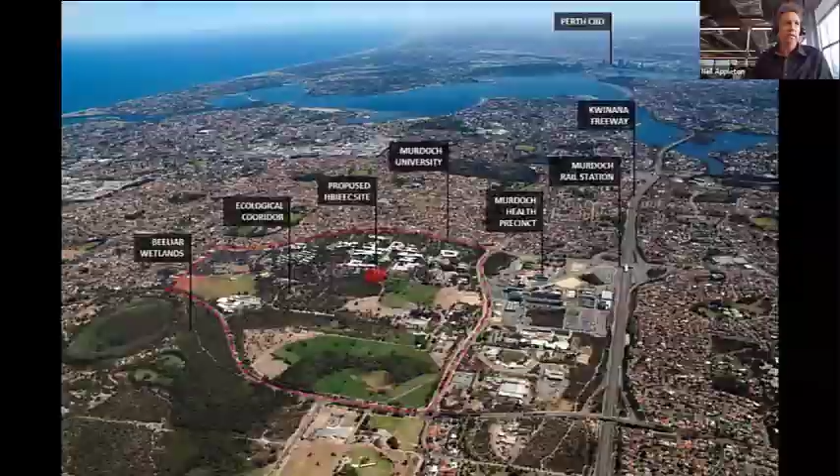It locates the building very much on Whadjuk Noongar country, but also on a semi-rural campus on the edge of Perth to the south, in what was a very heavy 1970s style campus, designed primarily and master planned by Gus Ferguson.

We were taken by how beautiful the campus was in many ways, around its structure and the bush nature of the campus, but also by how, in some ways, it was very resistant to contemporary modes of learning, which I'll talk to a little further on in the presentation.

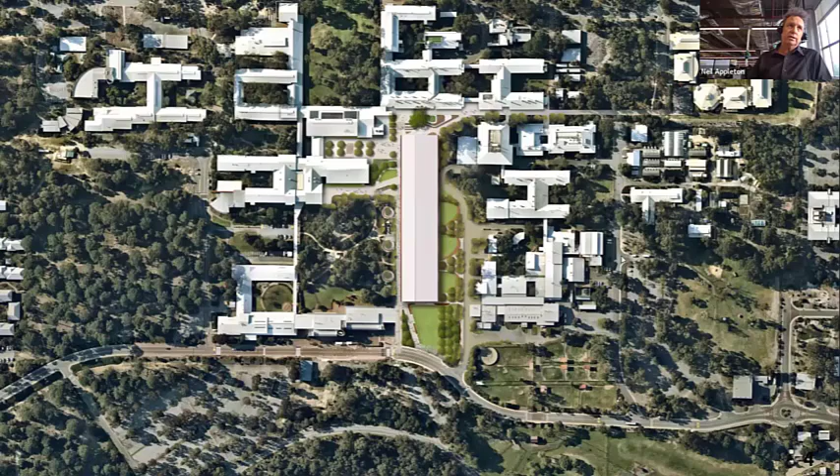Boola Katitjin was a major insertion into the campus. It had to accommodate a significant amount of teaching and learning space and become a nexus for all the students on the campus, but at the same time it had to connect from the major entry to the south on Discovery Way up to Bush Court.

Bush Court is effectively the heart of the campus, past Banksia Court. So not only did the building have to provide lots of space for students and academics, it also had to perform a very strong urban design piece on the campus as a connector, both to the environment and to the adjacent buildings.

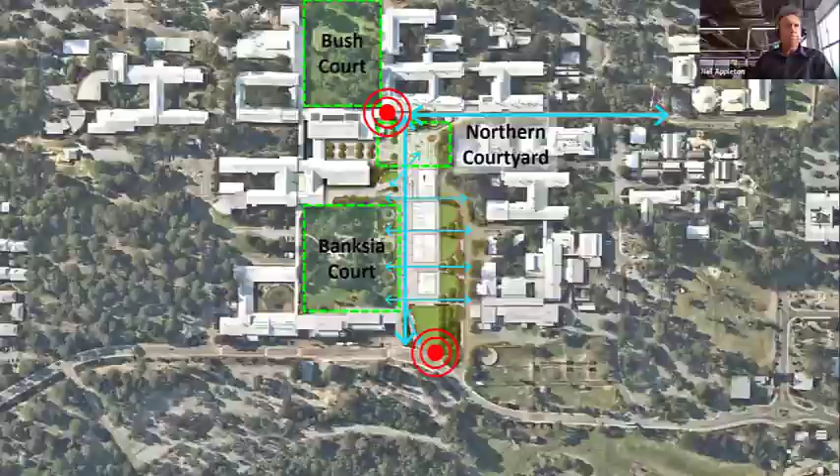It's obviously a very large insertion relative to the other buildings, but it's also in some ways acknowledging those buildings. From the very inception, the university was keen on demonstrating a commitment to the environment.

Not only in the sense that the building is highly connected visually to the environment, a lot of the educational spaces and peer learning spaces are outdoors in this building, with obviously large areas of shaded glass.

But they also wanted to innovate in timber construction, and the design team was very happy to come on that journey with them and drive a great outcome for the university.

Very large span teaching spaces, in that sense that we wanted to have timber both indoors and outdoors.

There's a substructural concrete base coming out of the ground, but then timber from the very lowest part on the south all the way up to the outdoors had a mixture of both internal timber elements, which were spruce sourced from Italy.

Dolomites, Hess, and then external timber that was either protected or exposed, which we had to then treat, and that's Australian timber, hardwoods sourced from Victoria sustainably through stewardship programs.

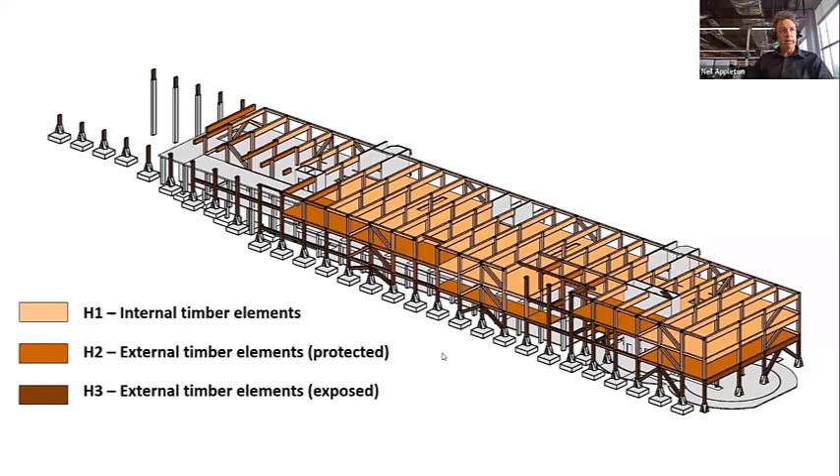As you can see, the building, as it came up, variously had a combination of these different products, depending on whether it was indoors or outdoors, until we arrive at a very large superstructural roof element, in keeping in some ways with the campus, but very much skewed and asymmetrically deployed to provide greater shade to the open areas to the west.

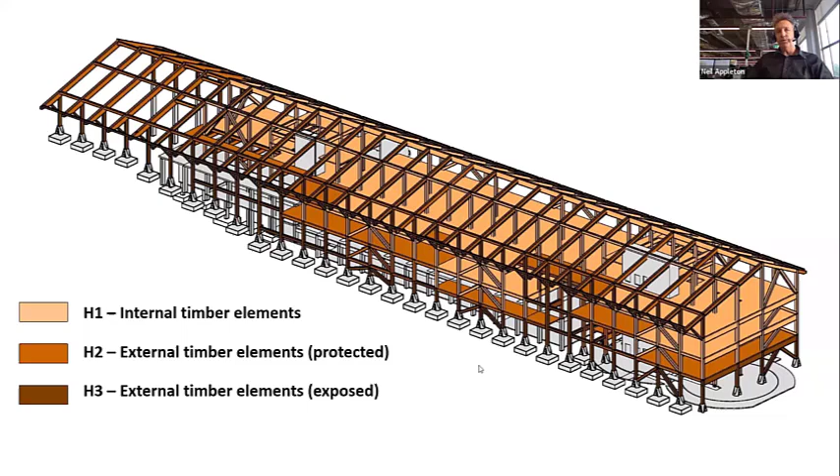And shedding rain, solar panel farms on the roof, etc.

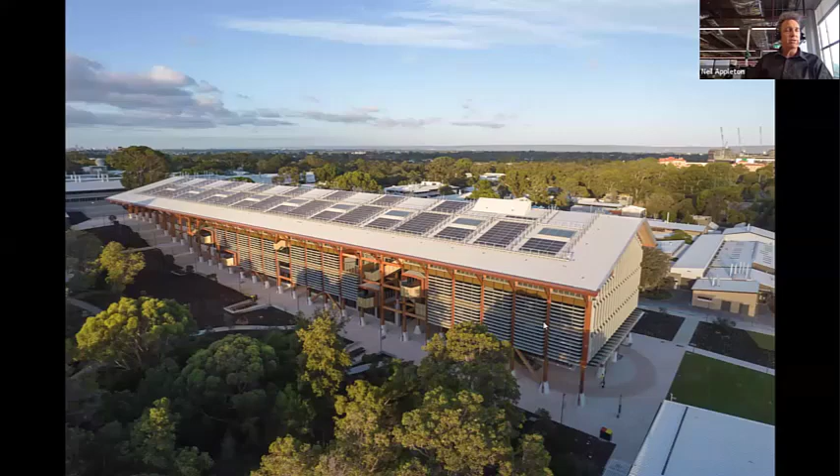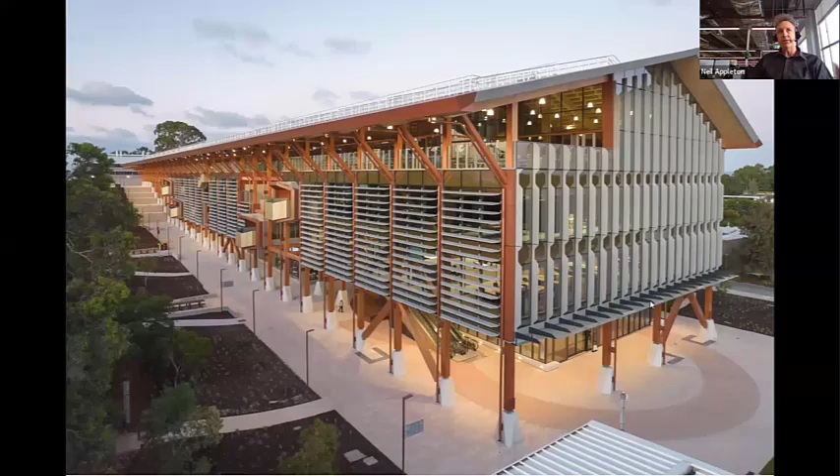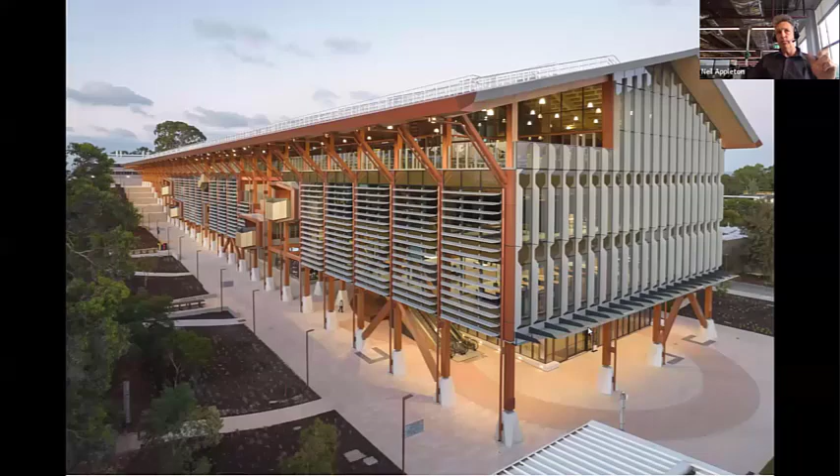Lots of sun shading, but wherever we found possible, we tried to bring the timber out to make it visible clearly inside, but out externally treated to obviously withstand the weather. Getting that balance between what was cladded and what was open was really important in terms of making sure that the building will last for a long time.

You can see in this view the roof is also constructed from CLT, which spans between the main roof beams, and to the west that large urban colonnade that runs in from the bus stops and the drop off on Discovery Way all the way up through the campus, where you can either choose to remain under the eaves but outside of the line of the building, or come into the building and traverse the length of it without going inside, but well undercover through the informal learning spaces, which you'll see as we go further.

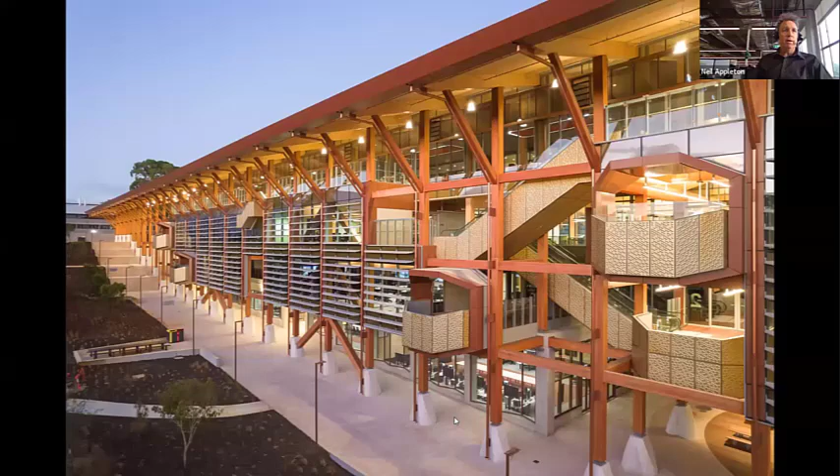Concrete kept at very much the ground level, raw on show, but as we progress up through the building, the timber then stacks in a modular, systemic way wherever possible. But of course, we also look to break the system where we think it's important to bring outdoor learning spaces to over the top of the large urban colonnade. And lifts as we go up.

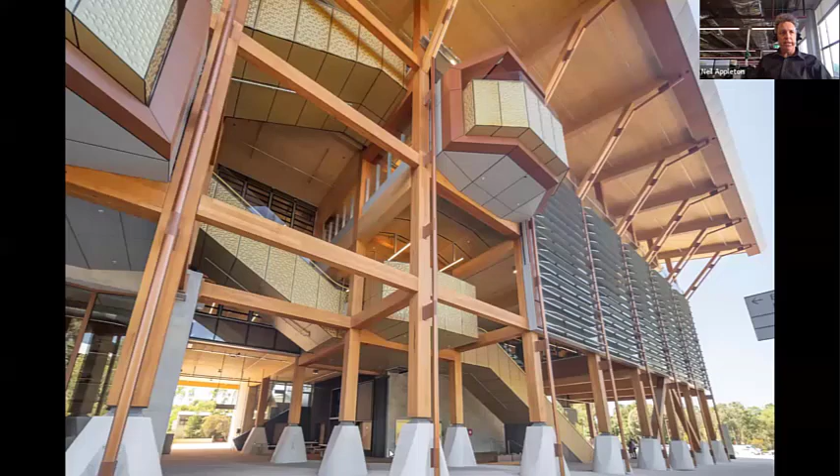Importantly, also, you can see that we've made connections laterally through the building on every level, which I'll talk to in a minute. But at ground level, we are making the building, given its length, a very porous building from Banksia Court across to the veterinarian buildings on the far side.

As I mentioned, a lot of the outdoor learning spaces connected to indoor learning look back towards Banksia Court, giving a sense of deep connection, but also a sense of how it knits into the campus, creating a clear sense of student promenade through from Discovery Way to the upper level of the campus.

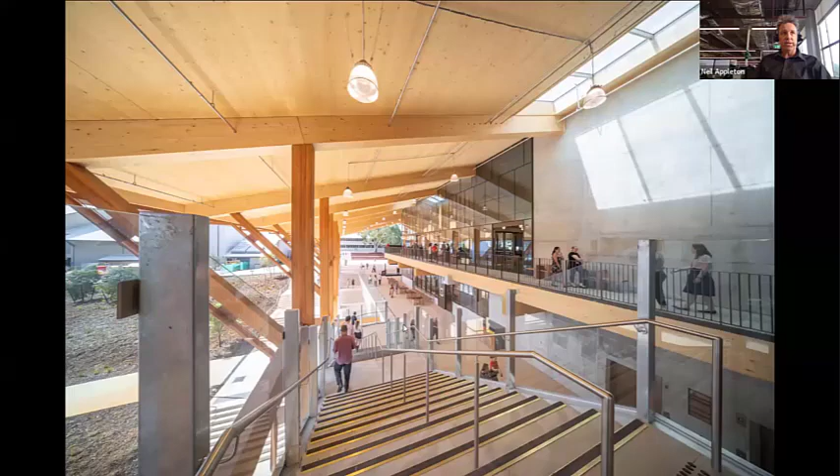And you can see this image. There is a destination space, which we in the video talk to a large meeting and gathering space adjacent to a large remnant gum tree that was retained through the project.

I mentioned Gus Ferguson's work. We find it very strong architectural work, which we enjoyed, and we felt that it was important that in some ways we riffed on the sense of the campus, not to throw it out, but to take some of the systemic language of Gus's, but to reinterpret it very much in a new, lighter timber form.

And as you can see, as you come out of the large bush court, Boola Katitjin is a very large and welcome opening to the north around that gum tree. So a very large space.

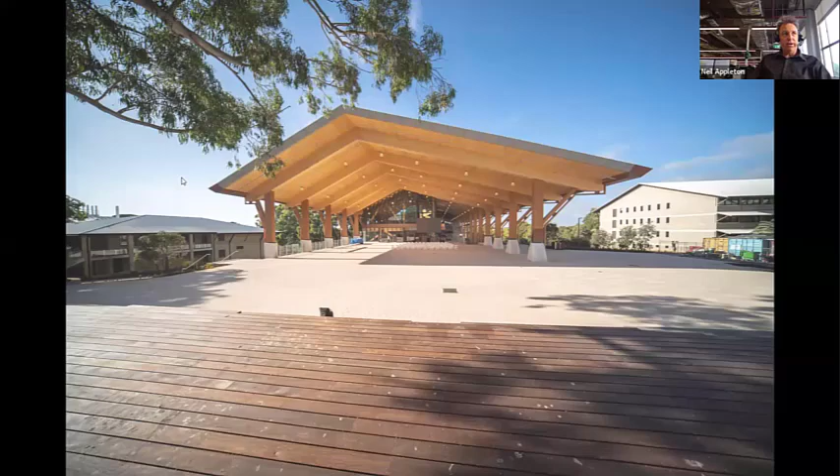I'll leave Aurecon, Ralph, to talk to the complexities of the structure in this area, but it's a really important gathering space. Again, as you can see here, Aurecon very committed to testing this structure within an inch of its life to make sure that it could withstand the rigors of lateral loading, given the shape of the structure as a portal frame. But it also importantly serves as a large cultural gathering space.

So as you can see, the linear orthogonal nature of the Gus Ferguson master plan, very long, thin buildings with double-loaded corridors, and the dark green effectively showing the flat floor teaching space, which are smaller format, let's call them tutorial rooms, and larger lecture theatres.

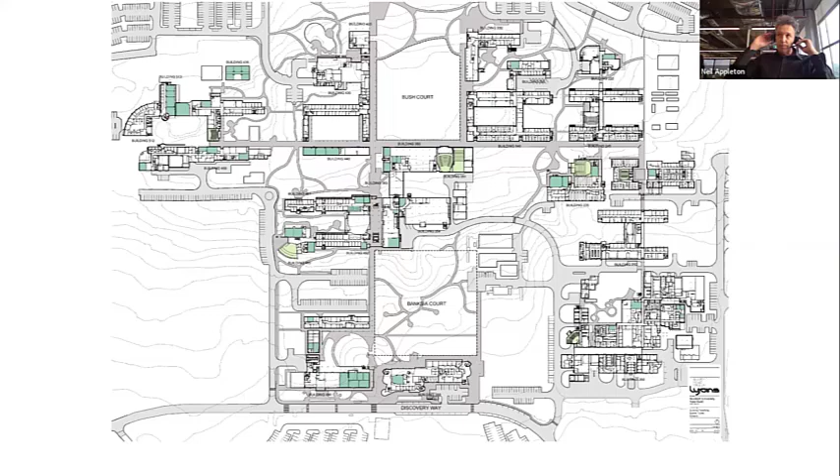And clearly, as you can see, that's a sort of, in some ways, there's an element missing under contemporary scale teaching, which is the ability for large groups of students to break into smaller groups and collaborate.

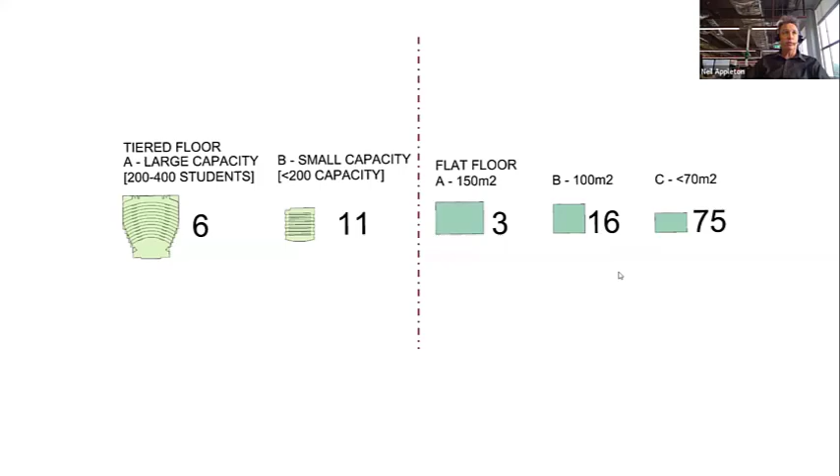That's the whole of the teaching cohort range within the campus. Before we started the project, our aim was to try to open up that middle ground where we had large format tiered and flat floor space that allows students to have didactic delivery, and then to move to informal learning in groups.

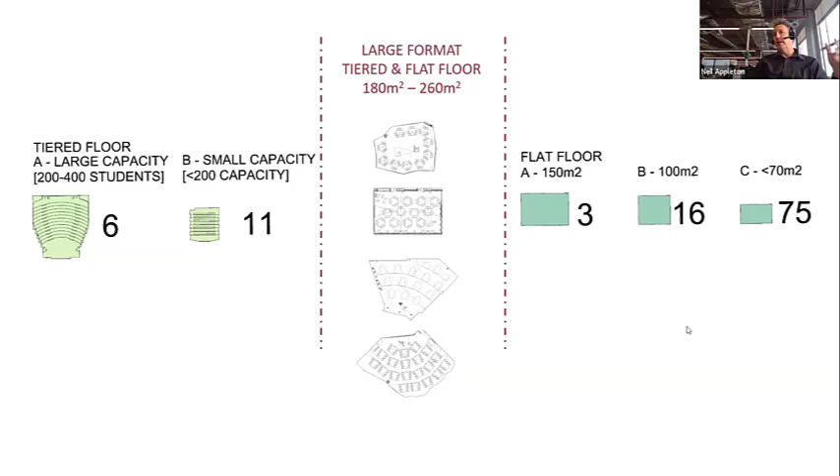The corollary of that is they then have large areas of indoor and outdoor breakout space to connect into. So that basically significantly increased the teaching space for the university. And whilst it still requires tutorial space and other learning closer in the academies, here we have a large general purpose teaching destination area on the campus. They range from 60 strong to 120 strong, with 90 being in the middle, and a whole range of different

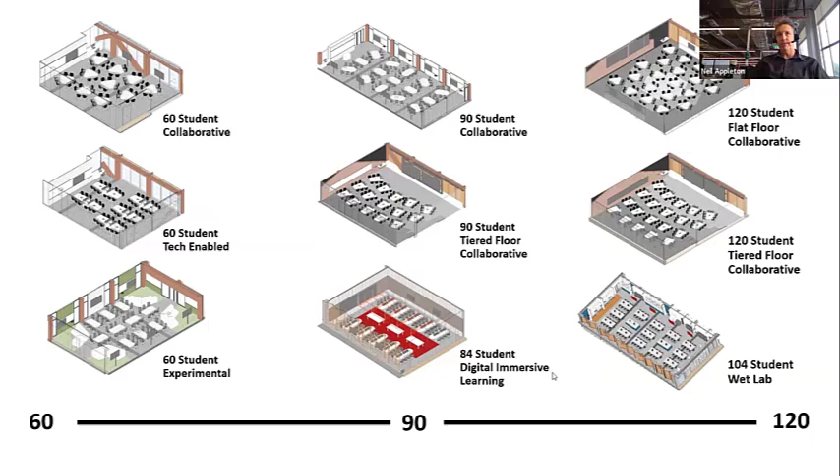Contemporary educational styles that are structured within that timber, large span timber portal frame post and beam structure.

In plan, imagine this is the upper level where the meeting space of Boola Katitjin on the north is. You can see that large corridor that runs through and arrives at a large informal learning hall in the middle of the building, which then has double loaded corridors. In some ways, it's a very large scale version of Gus Ferguson's plan, but we've stretched the corridors much wider to create a large informal learning environment in the middle, and then scaled up all of the teaching space on either side.

And at the very south end of the building, we also have a destination space for staff. Again, no designated faculties. This is actually a space for all staff to go and work in when they're engaged in teaching activities or afterwards.

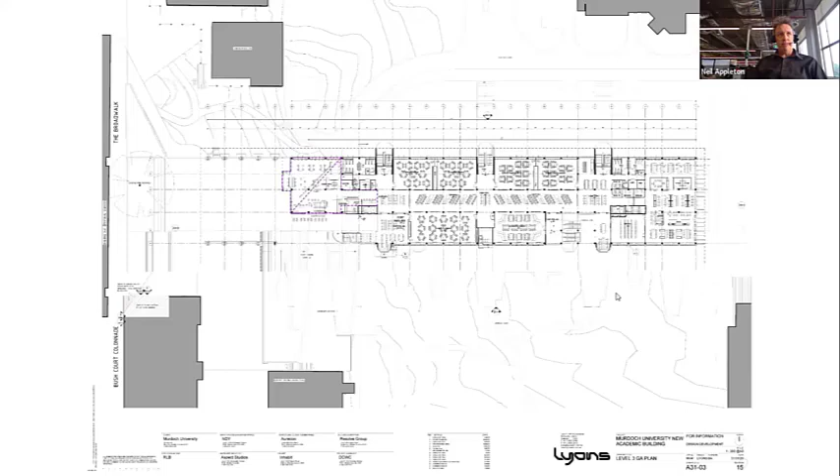The large spans are 11 metres for the timber, 8 metres through the middle, and 6 metres in the other direction. Very systemic and modular. But that still provides very large, 170 to 180 square metre spaces for collaborative learning, technology enabled learning (TEL), and experimental learning throughout the building.

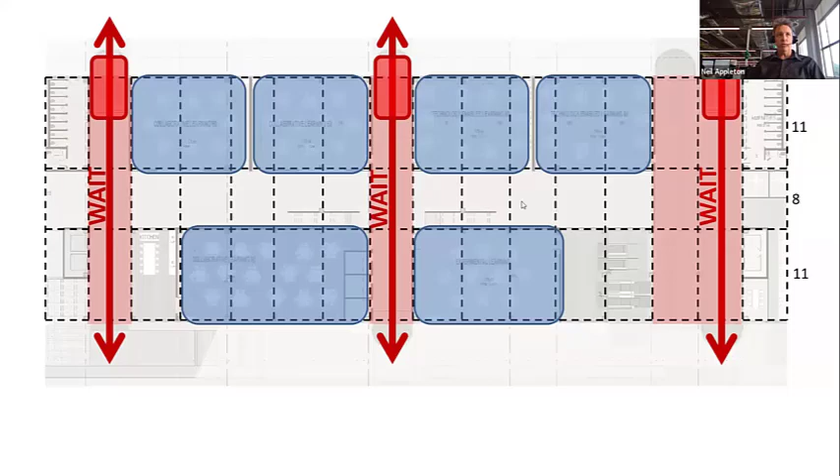Importantly, cutting through the grain of the building, we have large open breezeways that connect to the outside, with circulation nodes out to the east, views to the west, giving opportunity to wait and pause as you walk along the length of the informal learning through the student halls and then into the classrooms.

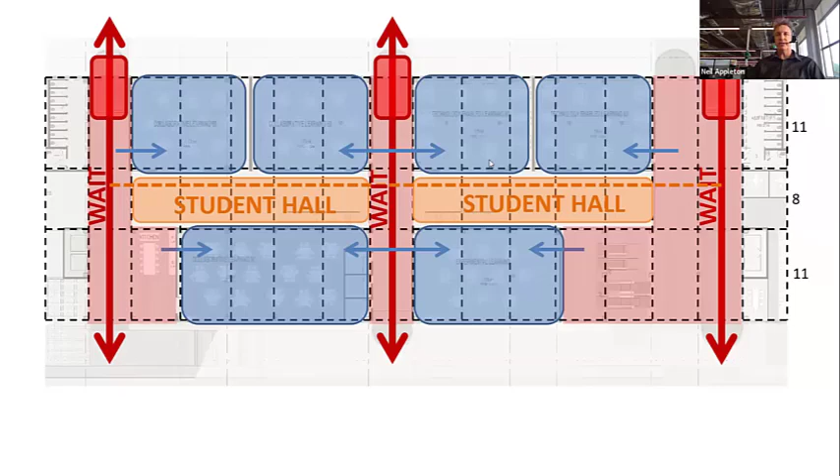Quite differently, rather than having entrance into the classroom spaces from the student hall, we inverted it and brought them off of those throughways, as a way of making the student hall not feel like it's continually space that has students moving through it, coming in and out of class and waiting to go into class. So the waiting space is flipped to the lateral spaces.

A key part of the design activity, which we worked very closely with Aurecon all the way through, was to think how we could deliver the engineering services through the building. We've got a UFAD system, underfloor distribution of air, and also bringing some of the other cabling through the floor. The benefit of UFAD, or low velocity air conditioning, is that it delivers the air at a slightly warmer temperature than needed, blowing it back down to the students and teachers at the lower level, which is important given the high floor to floors we have in this building to take advantage of the benefits of the timber.

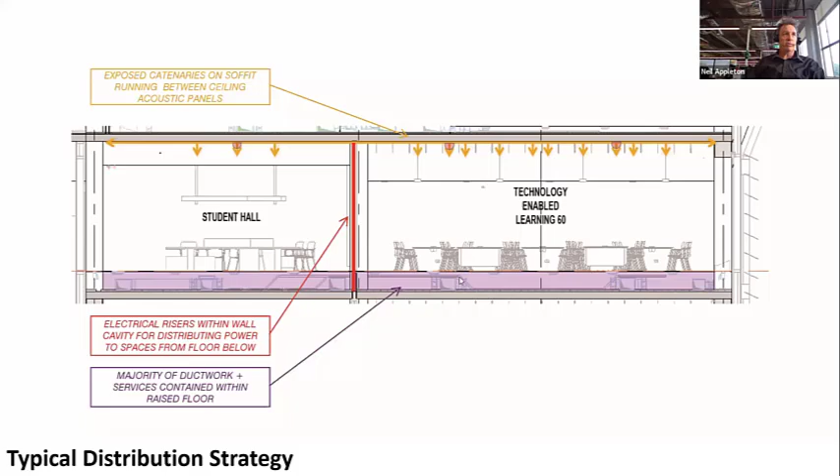And then, of course, we have very well designed systems. We put a lot of effort into designing the catenary systems on the soffit, along with acoustic paneling, with electrical risers running up through the walls from the cavities.

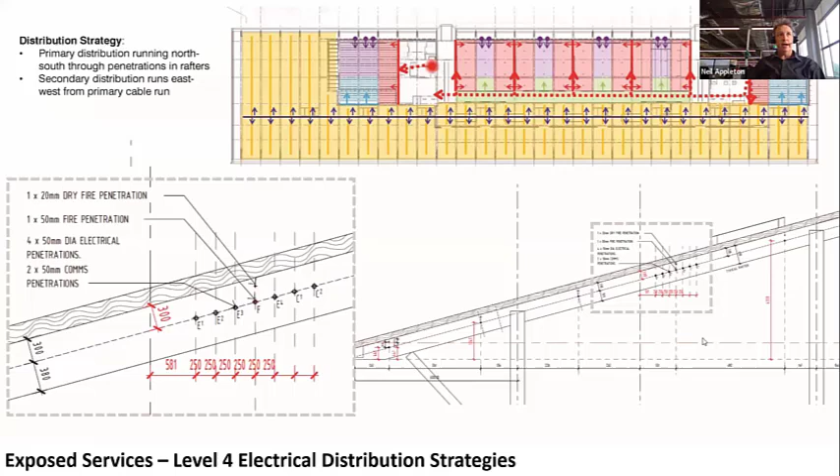Much of this was done through a very detailed shop drawing process. You can see here all of the services, significant fire, dry fire penetration, electrical pens and comms had to be all pre-designed through the timber, so that when it all came on site, it was all prefabricated, which sped up the construction process significantly, made it much simpler, and gives a very neat effect. That was a really important part of the design, to get all of that done through the design phase and not leave it up to site.

It's worth pausing to mention Multiplex, who are an incredibly key component to this project. They did a lot of work and research to make sure this building came together well. Whilst we all would talk about the biophilic benefits of working in a lovely building that's got structure on show, the smell's different, even Multiplex said that constructing this, once we got past the concrete trades, was an absolute joy because the site was much cleaner, and things came together much more quickly.

And I guess if you think about the labour force, 400, 500 people that work on these buildings for 2 years, the fact that they're enjoying their labour more, their construction, I think is important as much as it is for the legacy of the students and teachers in the future, enjoying the benefits of the timber structure throughout.

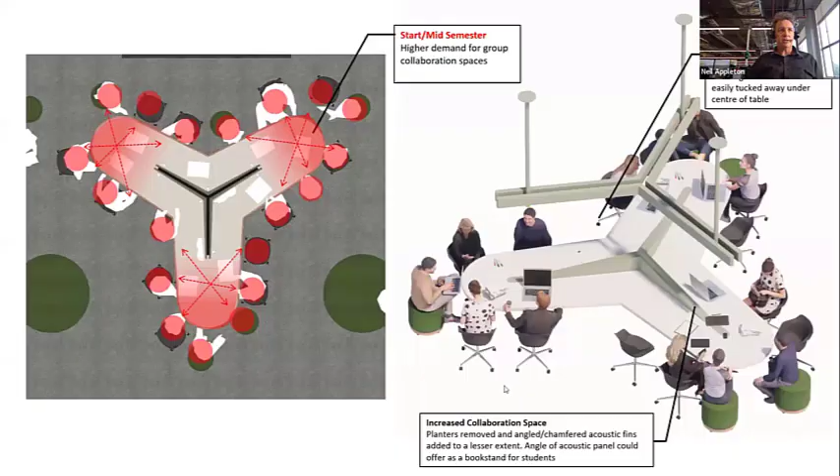or the teaching spaces. And I guess we designed this so that it works for all facets of the year when, earlier on in the semester, students are working, collaborating together, and as they then transition into the later part, they can then undertake individual study on these areas.

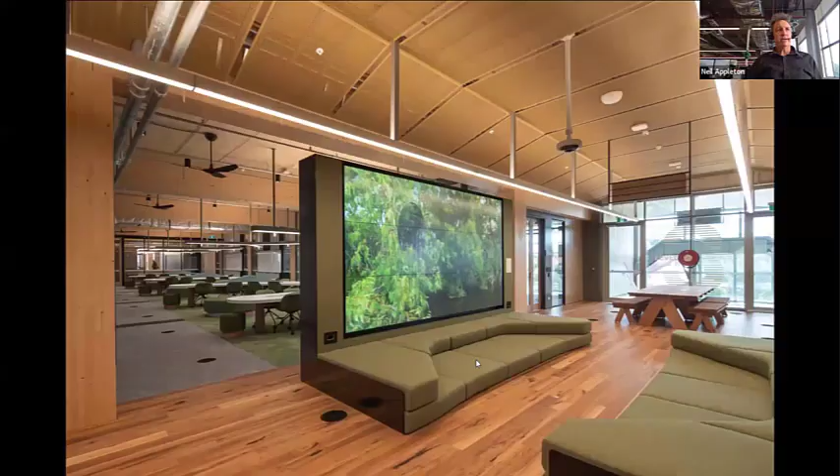Again, this is one of the lateral breezeways that runs through the building out to the facade. So when you're crossing through, there's obviously lots of opportunities for relaxation. Again, the coating of the timber talks to outdoor, indoor, natural ventilation. Kitchens are located in here with openable louvers, so we can get mixed mode ventilation.

And then finally, those breakouts in the sort of Banksia pod idea of these pop outs through the facade to bring you out over the walkway that runs up and down north-south through the site and looks out over Banksia. The Banksia Gardens is really critical. Looking back, as you can see, connecting those outdoor spaces with escalators to drive engagement in them is important.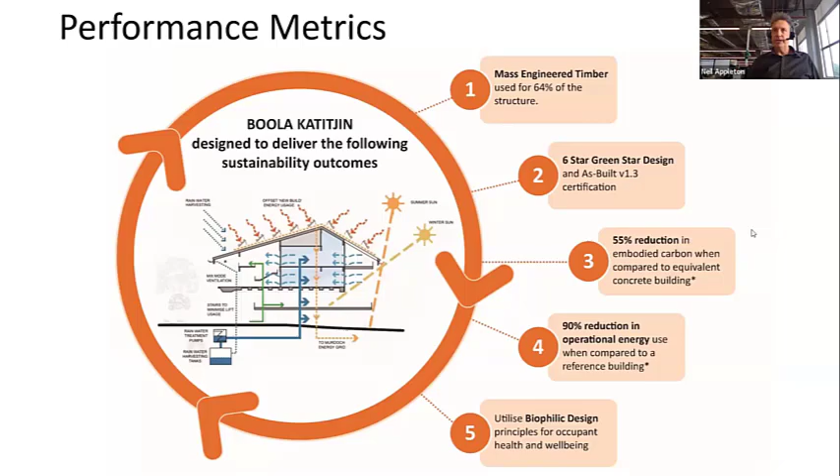Before I started, I just wanted to touch on something that Neil spoke about. The one thing that really strikes me about this building and comments that people have made, and I'll just reinforce to those of you on the call that are not WA based, if you ever go to Perth, it's a public building. If the university is open, you're welcome to go there and walk through it. And to a person, everybody that visits site says that the photos don't do this building justice. So it's an amazing building, and the way that it makes you feel is kind of next level.

And I'm kind of biased as the person that kind of set the structural scheme in the initial thinking of the project. I thought I was super biased, but now I'm hearing it from other people. I think it is a lovely building, and if you're ever in Perth, please do go and have a look at it.

The other thing which is not lost on me is that the architecture of the campus, this really does tip the hat beautifully to the original architecture of the campus, which has a lot of off-form concrete in which you can see the grain of the form boards that were used, and it just seems to be a lovely, more sustainable representation of the same sort of architectural language. I've got to be careful as an engineer if I start talking about architecture. Neil might start yelling at me, so I might just leave it at that. But for me, it is a beautiful tip of the hat to what is already on campus.

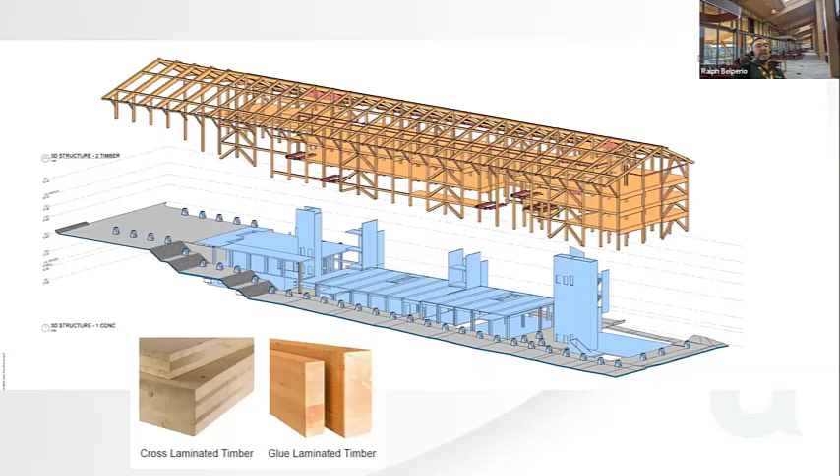I did see a question in the chat about lateral stability, and again, this image shows it pretty well. So the lateral stability of this building is dealt with by a combination of concrete elements that you can see going up through the structure there, as well as the timber bracing, which is exposed where required. So in reality, you would kind of call this a hybrid in terms of its structural response. And Neil spoke about the embodied carbon reduction in a building like this, and the percentages that he quoted are kind of typical of a building like this, which is long and still has a reasonable amount of concrete in it to do the jobs that need to be done, like lifting the timber structure off the ground and dealing with the issues of lateral stability when you need them.

You can see, as it's been discussed earlier, that the building was built from a combination of CLT and GLT. Once we started running the possibilities of it being an LVL structure, in our discussions with Wesbeam, we knew that their facility was pretty much maxed out supplying the residential market, and that to turn their manufacturing facility to supply a project like this would not have been good business for them in terms of the impact that would have had on their ability to supply the local market in their traditional sense. So I'll talk a little bit more about the processes that we went through to determine the capacity of the market to supply.

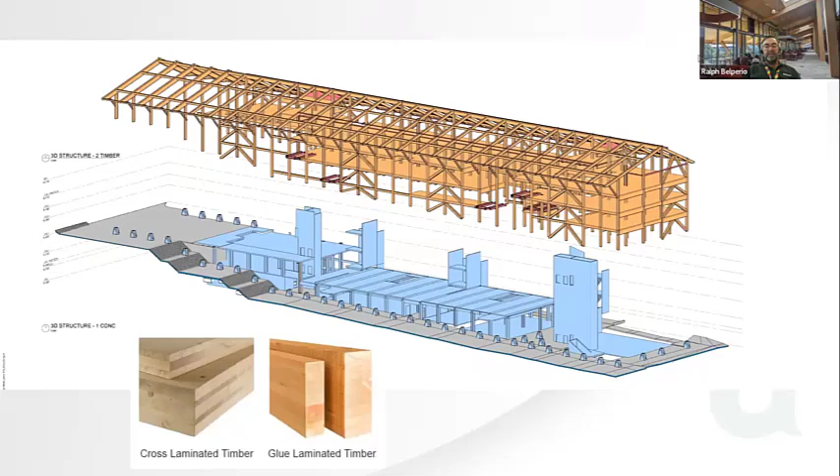So in order to find a way to deliver WA's largest mass engineered timber building, we thought it was appropriate that we pull the industry together to understand what the capability would be like to do that. So we hosted a timber forum in our Perth office in the middle of July in 2019, and we invited industry representatives, and most of the major players accepted and travelled

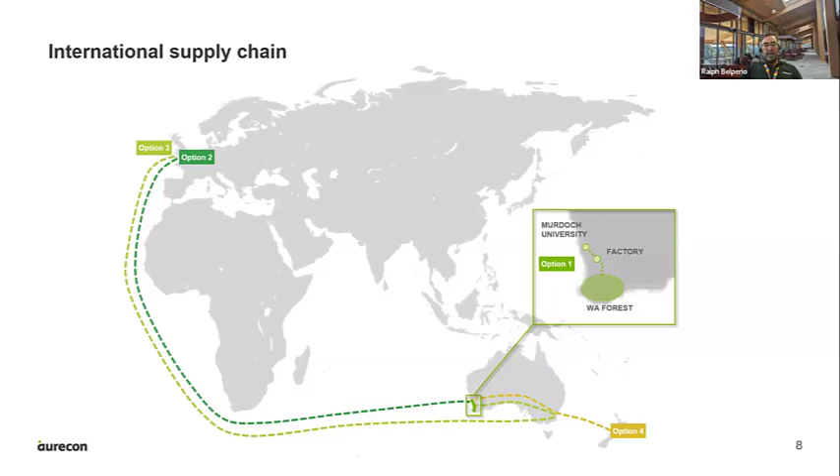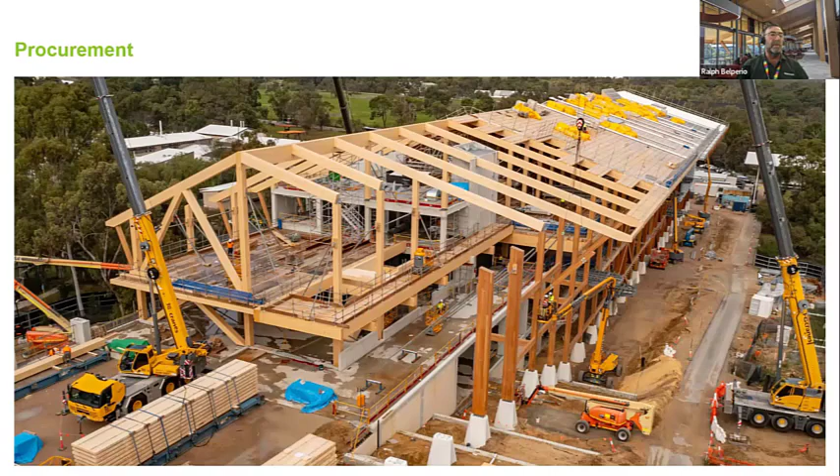It was very important that we had early contractor involvement in the project to understand how we would go about detailing the connections and making sure that the trades would be able to assemble the building, considering it was something new and different in the market that we were working in. So with Multiplex coming on board, we were able to source a number of elements and then build a prototype in the workshop so that they could get some familiarity with the detailing that was proposed and the ability to look at the various connection types.

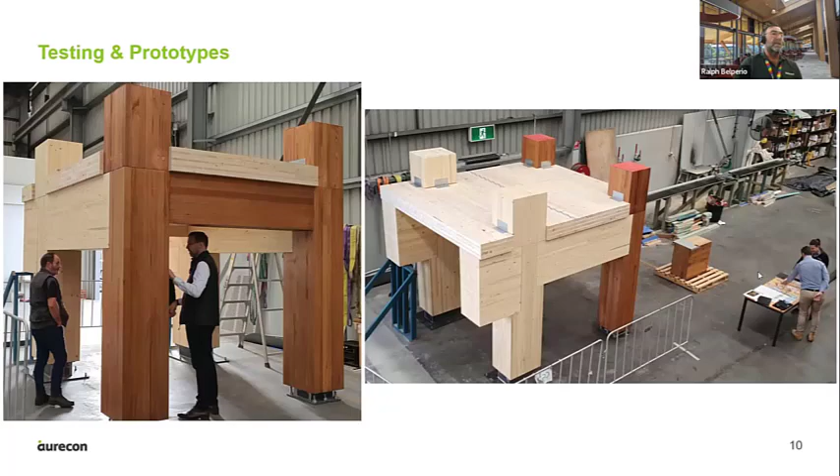And further to that, again, as Neil mentioned earlier, the northern event space, which is a 30-metre spanning portal frame, which is probably my fault because at the concept stage, we were looking at options for that northern event space, and having been involved with a 40-metre span portal frame in the late 80s at Tumut in New South Wales, I thought, well, we should be able to do 30 metres easily.

The big difference being that the one we did in 1988 was an industrial building, and it didn't matter what the connections looked like. But I don't think Neil was going to be too happy with very large plywood gussets attached to the moment connections, and then validating the fire performance of those would also be a bit of a challenge. So we did do a full-scale test on the most critical knee connection, and you can see my co-collaborators, Nikish on the left and Pratik on the right.

And my gratitude to these two guys, absolutely, I need to reinforce that because, you know, I did the glory work at the front end establishing the concept, and these are the guys that did the hard work during the design and construction phases to bring this all together. So I tip my hat to these two guys, and the efforts that they put in over the course of the project.

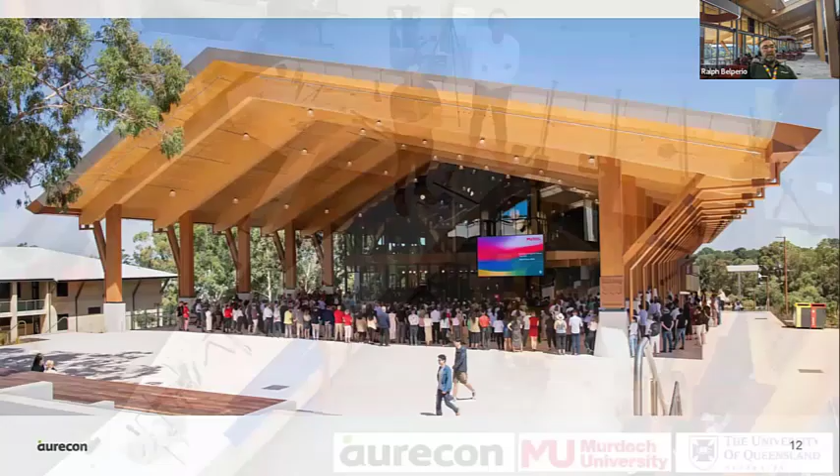So again, the northern event space in use. I think the great thing about photos like this is it gives some scale when you can see people standing in the event space, just to how huge this area is. And one of the big structural challenges in all of this, for those of you that are timber designers would know that we're always chasing serviceability criteria in timber structures.

So having a clear span, 30-metre clear span space, and having it interface with the building, which is effectively propped at the apex, means that you have to be able to control deflection in the middle of the portal frame to a point where you don't read the difference between the two. So we did put a lot of work into working with the constraints that were placed before us to get an appropriate aesthetic outcome

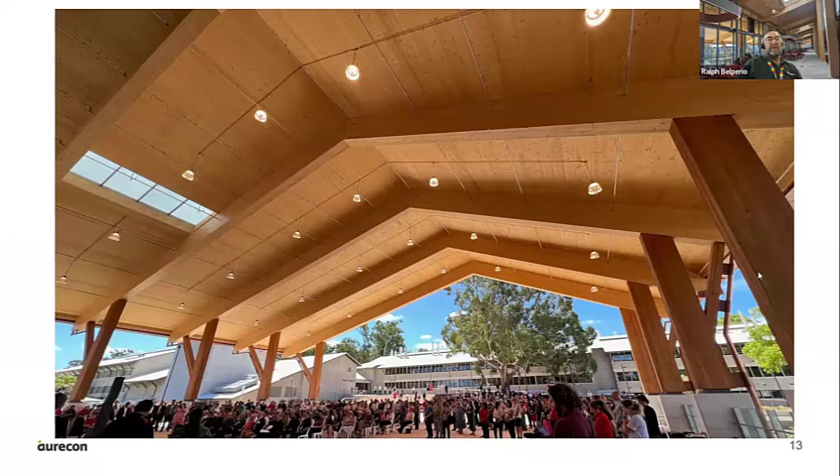for that junction between the free spanning portal frame and then the glazed box that you can see back in the building there. And this is a view from the other side, again, showing that event space functioning, I believe, at the opening of the building.

So again, as I mentioned earlier, we were lucky to have a very motivated and focused client who was also very keen for us to embed some innovation into the project. And when he said to us, we want to build some innovation into this project, we basically had carte blanche. So everything was on the table. At Aurecon, we use design thinking methods.

So we basically ran an ideation workshop with Murdoch University, University of Technology in Sydney. We also had RMIT there, where we put all the ideas on the table and then decided to hone in on something that we thought was achievable and doable within the time and the financial constraints. And we decided that we would attempt a proof of concept for robotic installation of the screws on this project.

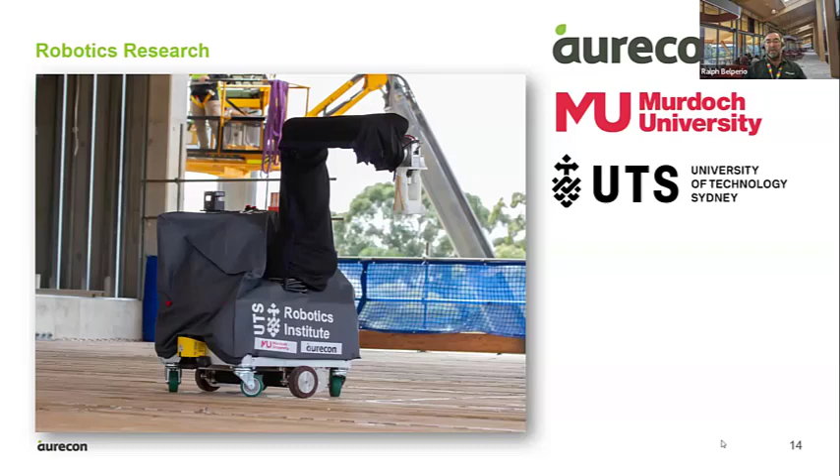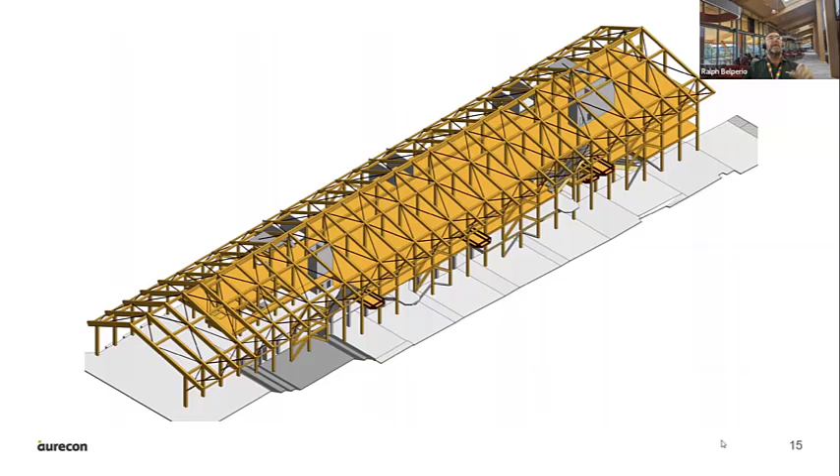The reason for that is that it's a highly repetitive process, and what we're trying to do is we're trying to make timber construction more mainstream. So if we're able to automate the elements of timber construction which are rote and repetitive and bring health and safety issues with them, then we can help to break down the cost competitiveness scenario between timber construction and traditional construction types.

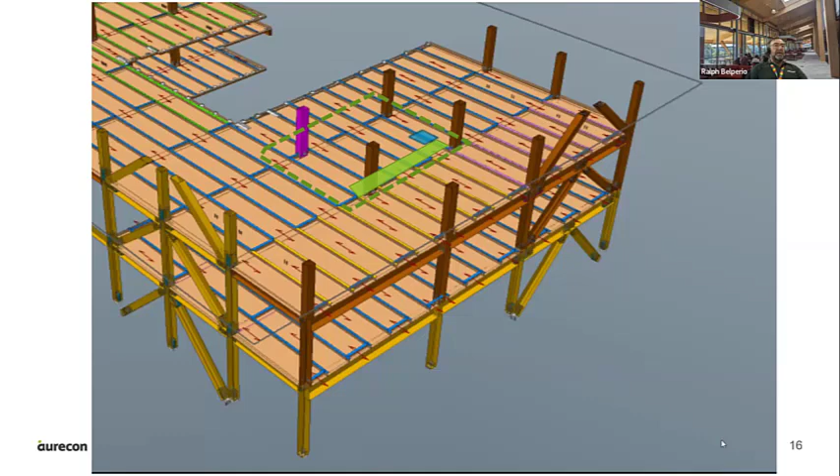So the first thing we had to do was choose a location in the building to do our trial, and this looked like a good spot. It wasn't lost on us that we chose a spot in the middle of the building just in case the robot decided to go rogue and drive itself towards the edge of the slab. We didn't want to lose $250,000 of robot off the edge of the building, so it seemed like a good idea. We could pull the plug before it got to the edge of the building, and we chose this strip.

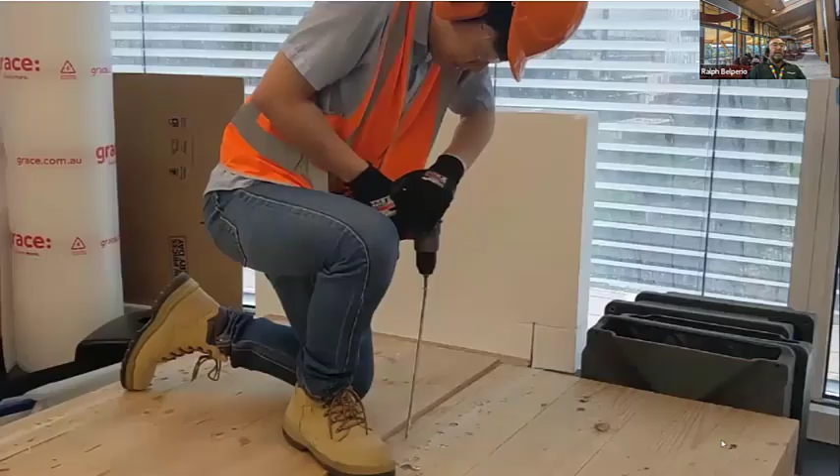So effectively, the screws that we're talking about are 340 millimeters long. They're a Rothoblaas screw, and what we're automating is this process here. Now, I don't know about you, but if I was doing this job all day, every day for a number of weeks, installing those 300,000 screws, this doesn't look like a lot of fun to me. So this is the job that we're trying to automate.

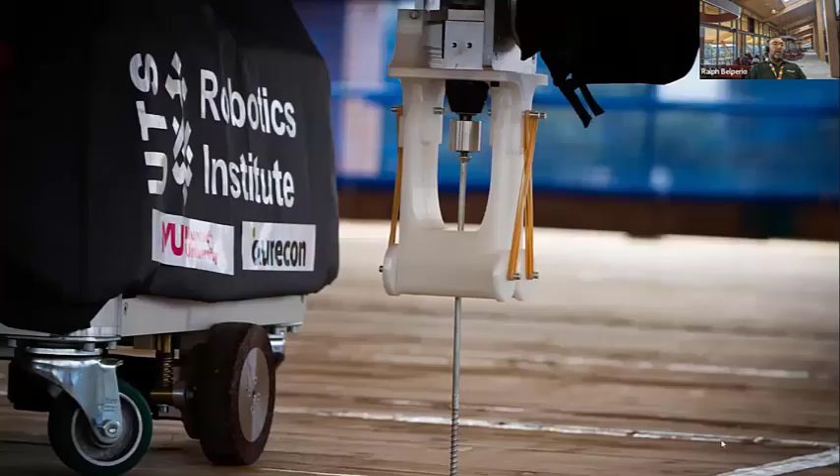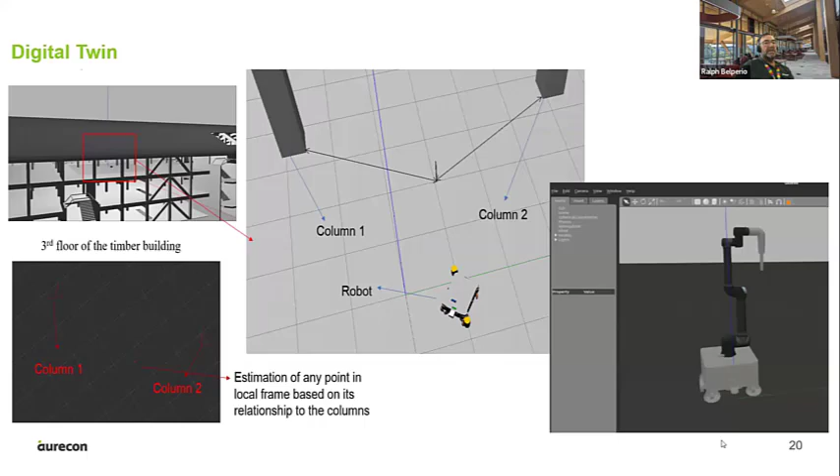So we were conceptualizing this all through COVID. So we couldn't really collaborate in person. So a lot of the work was done over Teams. We provided our Revit models to University of Technology in Sydney as a digital twin, and effectively they built their software for the process in the virtual world. And this is a virtual representation of the robot installing the screws and then finding its way from location to location within the building.

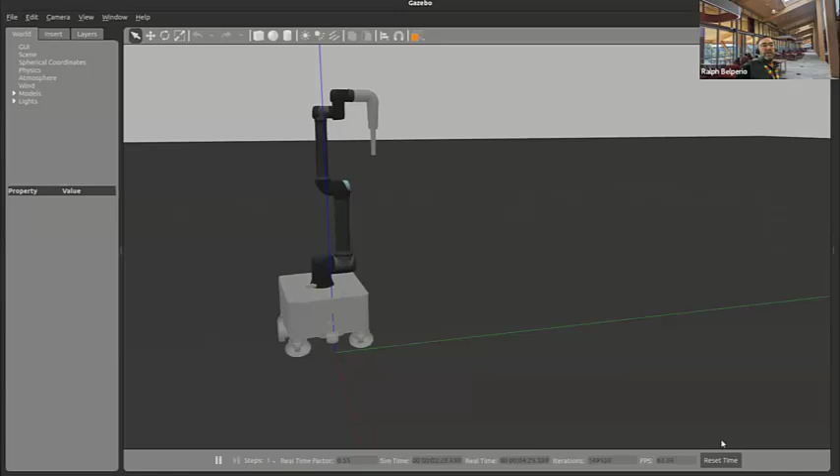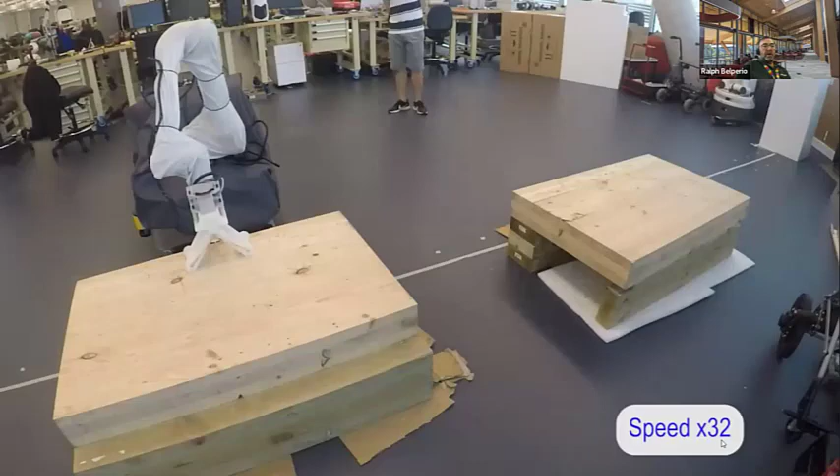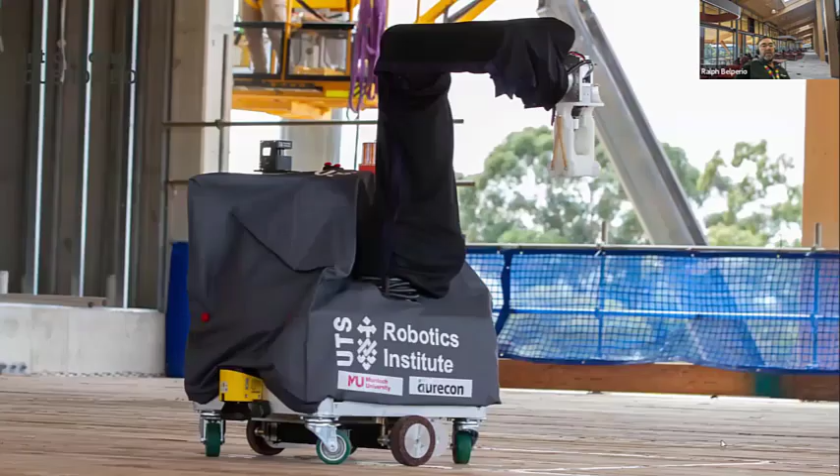So once they were able to validate the software approach virtually, we then moved to a trial in the UTS labs in Sydney. The white box you can see on the right-hand side is representing the column in the building. So the robot uses a combination of GPS and LiDAR to locate itself, and then referencing back to our Revit model can locate the individual screw locations to find its way to where it needs to go.

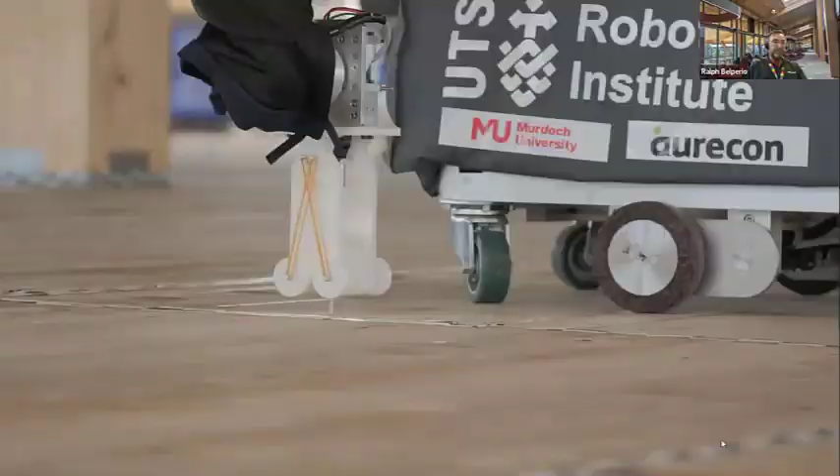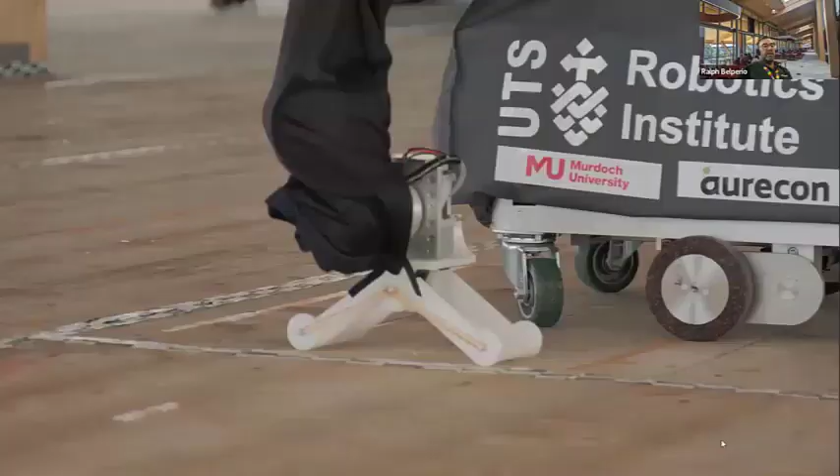So all of this culminated in a proof of concept on site. And after a naming competition, the robot was named QuendaBot. The Quenda is a native digging marsupial which lives in the bushland and gardens on campus, and hence the name was given. And this is the trial on the day, showing the robot installing the screws on site, well attended by media, got some coverage from 7 News and the like.

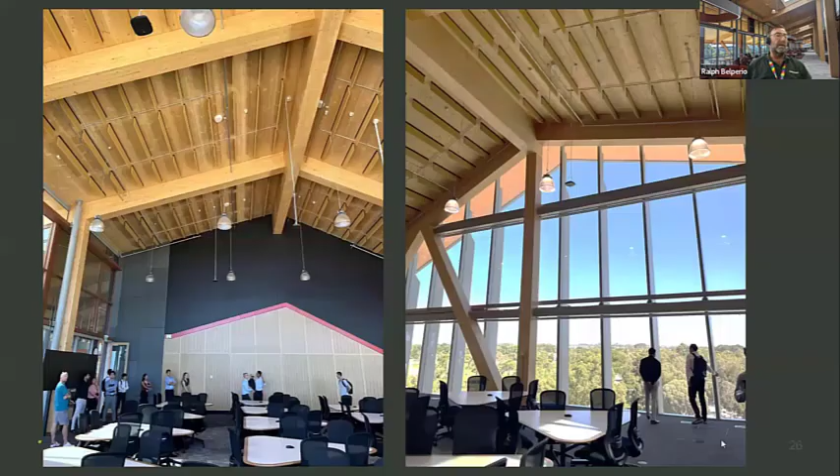So cognizant that we're getting close to the end of our time and wanting to leave some time for questions, I was just going to finish with some of the images that I think Neil has probably already gone through and explained in better detail than I could in terms of the architectural approach. So I will fly through those. I just wanted to finish by touching on a couple of things that we're doing in this space. At Aurecon, we're members of MECLA and contributing to those discussions about embodied carbon.

We have been actively involved in Timber 2032 forum hosted at UQ, advocating for the use of timber in the Olympics in Queensland. We're a principal partner at the Advanced Timber Hub, working closely with Keith Crews and the crew at University of Queensland to drive forward those research initiatives to push timber to become more mainstream, and hosting government delegations up to Queensland.

We have a very strong track record of having delivered timber buildings, to try and get more traction with government. Last week I was lucky enough to attend the opening of the Timberlink plant in Tarpeena in South Australia, which was attended by the SA Premier Peter Malinauskas, and I was lucky enough to have a few minutes with him.